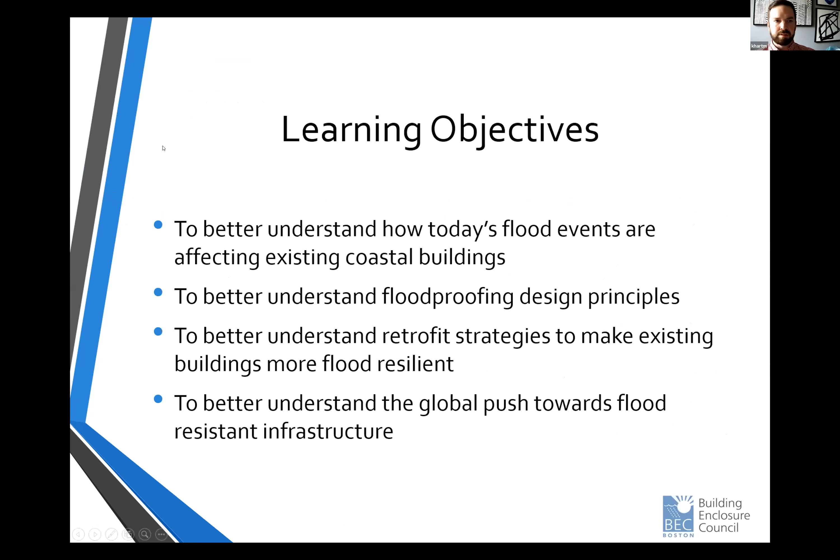Learning objectives, you probably have these already. Just a quick outline of what we're going to talk about.

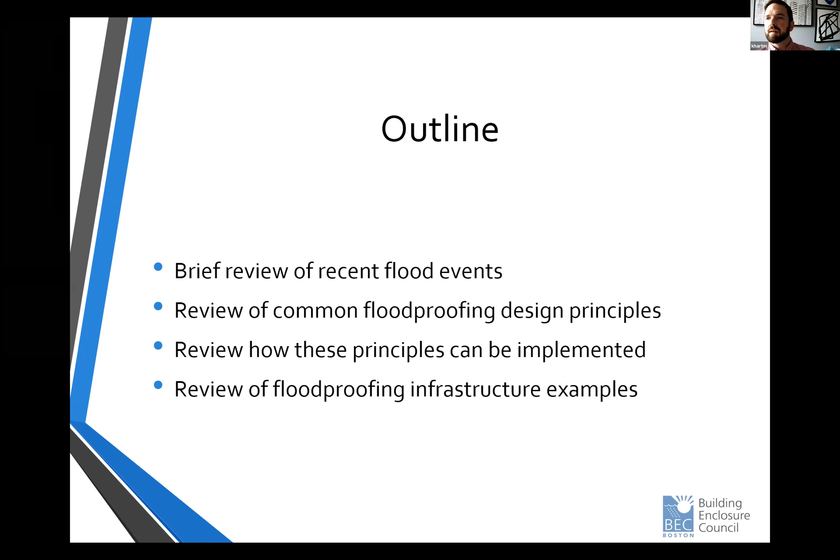First off, we just want to go through why this is important. Why are we talking about floodproofing more today than ever, right? So just a quick background on how we got to where we are today. Some questions here: are floods getting worse? Is that a problem? The short answer is yes. The floods are getting worse. We're seeing more severe storms and the repercussions of those storms. And the projections are going to continue that this is not going away anytime soon.

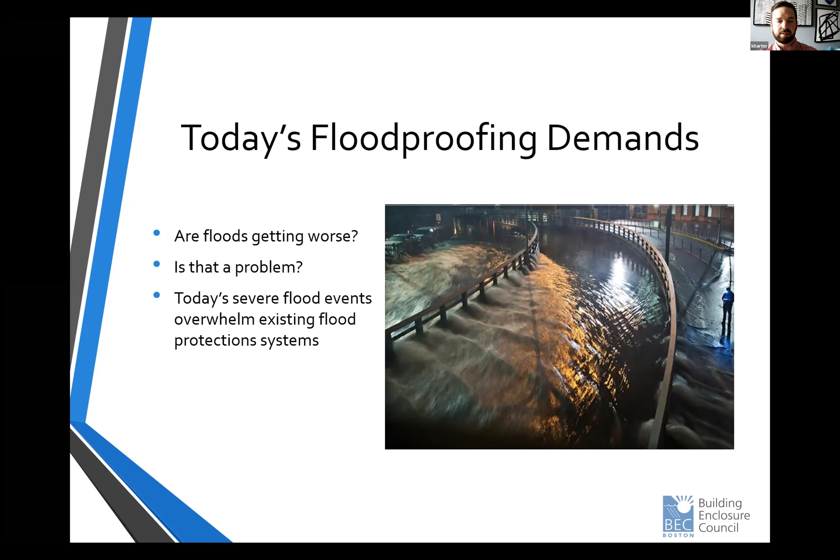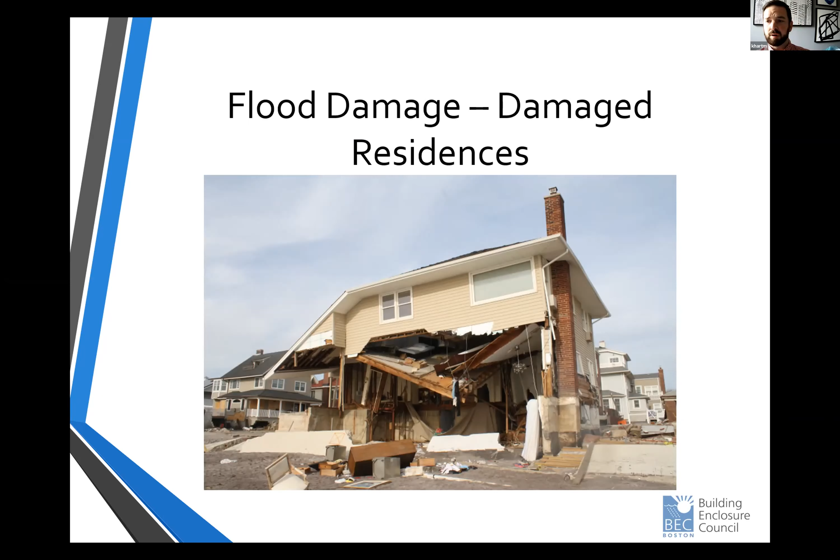So some examples, the first few slides are from Superstorm Sandy back in 2012. I'm sure everyone is familiar with Superstorm Sandy. Of course, here in New York, we're very familiar, but here's a low-rise, timber frame residential structure where the lower floor was washed out due to flood water, but damage just isn't caused by only flood water.

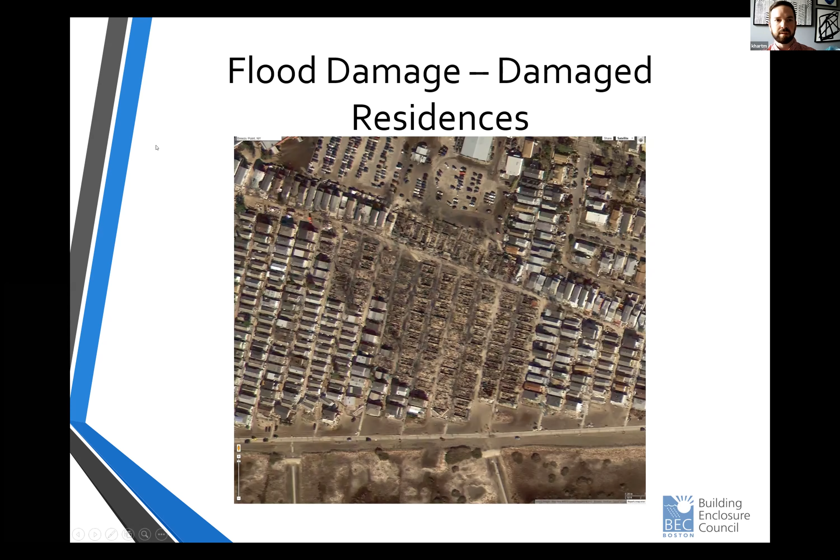Here's an aerial shot of Breezy Point in Queens where an electrical fire started during Sandy. Can you see my mouse if I do this? So you can see this area where one house, unfortunately, caught fire and the flames spread to this area. So while that's not your classic quintessential flood damage, nonetheless, flood damage.

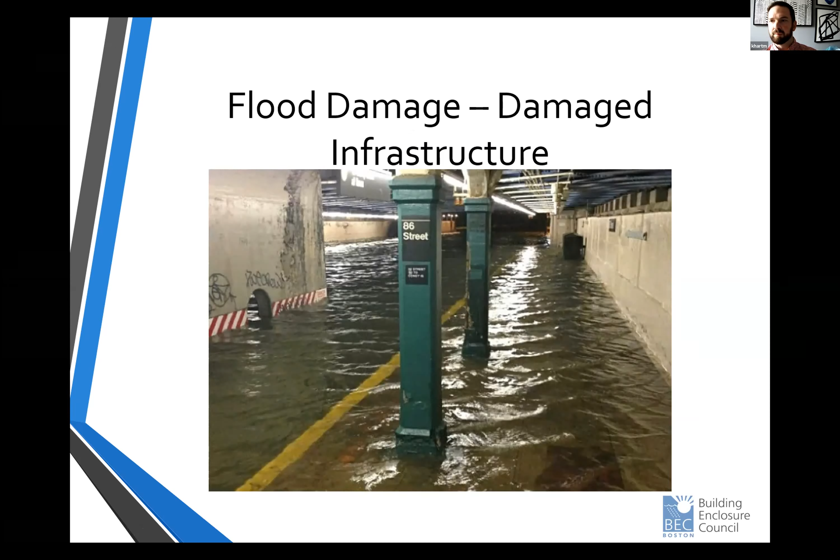New York City is not alone. Most coastal cities, whether you're coastal being along a river or along the Gulf or an ocean, are experiencing similar flooding conditions. In 2017, Houston was hit by Hurricane Harvey, considered the wettest storm in U.S. history. We'll touch on this a little bit. But since that, almost on an annual basis, Houston has experienced substantial flooding, right, on unnamed storms, not hurricanes necessarily. And they didn't used to have this frequent occurrence.

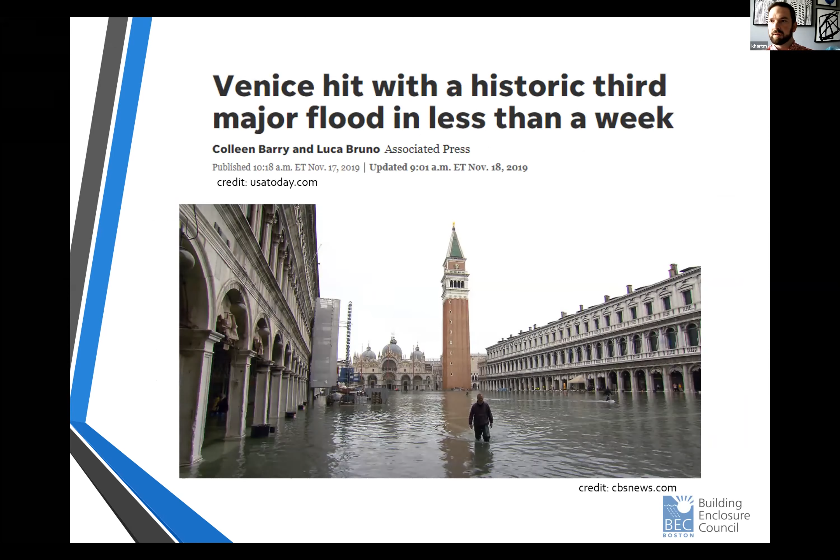So New Orleans, right, in 2005, Hurricane Katrina. And of course, it's not just a U.S. problem, it's a world problem. This is a shot of Venice underwater, and they, of course, frequently have flooding problems themselves. So what's causing this? Without getting too political, climate change, right? Climate change is real.

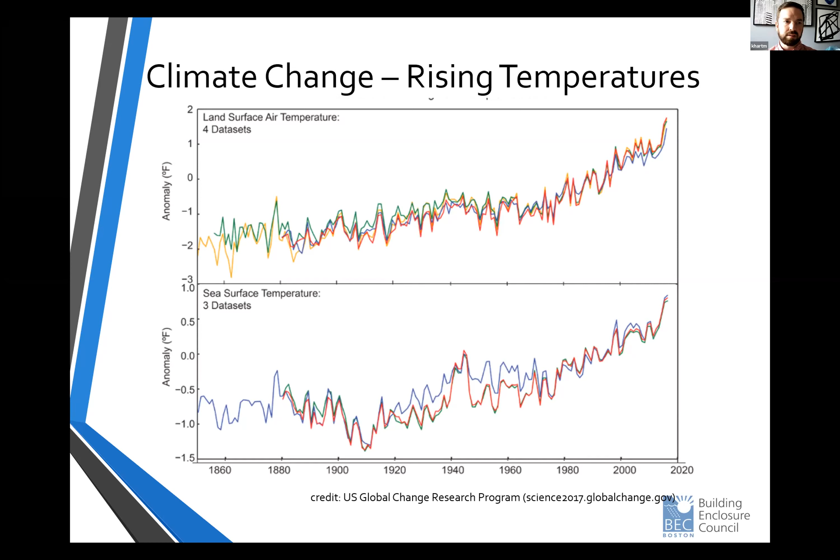This is credited to the U.S. Global Change Research Program. It shows over the course of about 150 years or so, a little more, the rising temperatures across 4 data sets.

What does that mean? I'm not a meteorologist, but I'll try to explain. Warmer air can hold more moisture, and that warmer air is the catalyst for more severe storms. So we're getting more 100-year storms, 500-year storms, and so on. Hurricane Harvey was one of the wettest storms the U.S. has experienced, with a peak rainfall reading of almost 61 inches in the course of about a week. They got hit incredibly hard with rainfall.

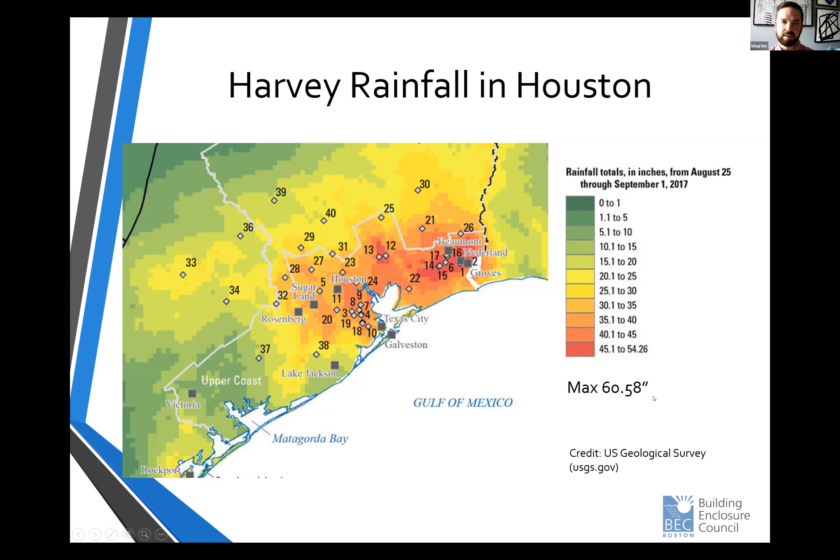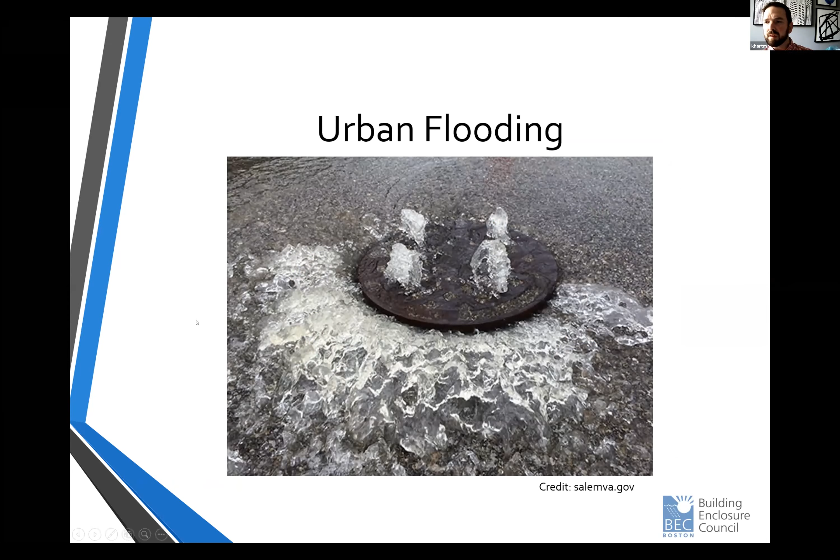Our current stormwater management systems, generally speaking, are not built to handle such large rain events. There's something called urban flooding, which in layman's terms is rainwater that hits an impervious surface and has nowhere to go. The drainage system can't handle it, or just doesn't have anywhere to pump to because its reservoirs are already full. That's proven to be a problem too in terms of infrastructure.

Climate change is also raising sea levels. With Sandy, the wind and rain of Superstorm Sandy were not the biggest problem. It was still a hell of a storm compared to most storms, but compared to your average hurricane, the wind and the rain wasn't that bad.

Now, with rising sea levels, we don't necessarily need a Superstorm Sandy type event. It doesn't have to be that severe to experience flooding. There's something called high tide flooding. This graphic shows it, where on the left, in the 1950s, it's just a schematic, but sea level would have to overcome a greater storm surge to rise up to the point where buildings flood. Now with higher sea level, you don't necessarily need a super large storm surge. You just need high tide, and that's high tide flooding.

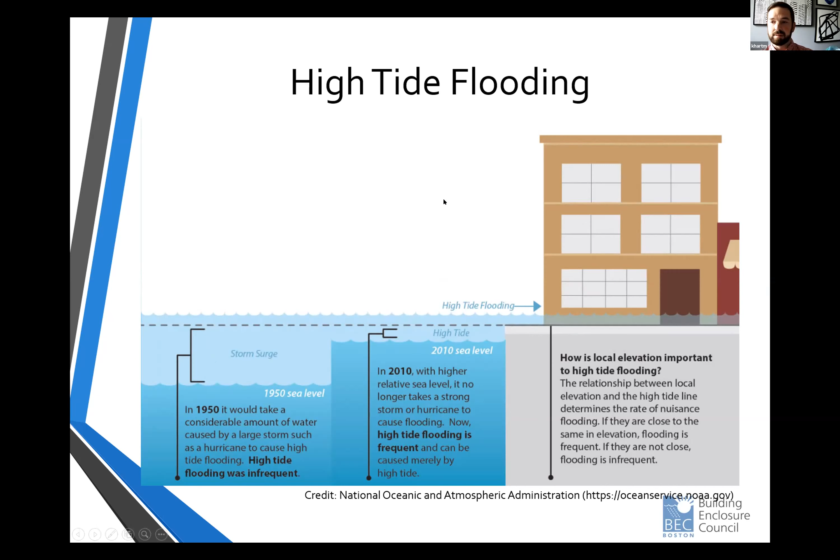This is something Miami experiences fairly frequently, where they call it sunny day flooding. There might not be rain, there might not be a storm, but Miami's built on porous limestone, and there are aquifers and groundwater within that limestone. As the high tides come up, it pushes that water up. So despite any rain events, you can have a week of sun, but if the high tide comes up high enough, it's going to push all that water up - sunny day flooding.

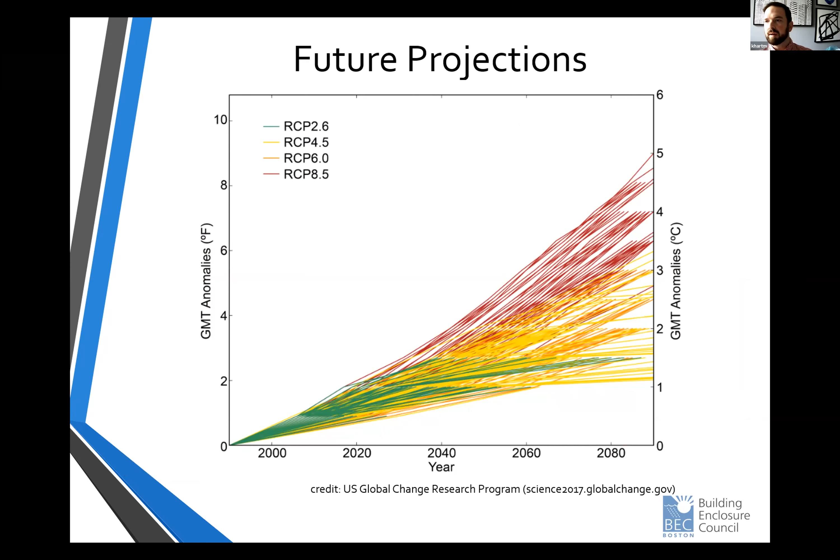And it's not looking too good moving forward. We're having the conversations, but projections show that it's only going to continue. So as an industry, we're starting to pay more and more attention to it.

In New York, after Superstorm Sandy, we took a look at our flood proofing protocols, or flood prevention measures, and started to sharpen our pencils. We realized that the flood maps we were using, the FEMA flood insurance rate maps, often abbreviated as the FIRMs, were dated from 1983. So we wanted to start updating our FIRMs, our flood maps, to better represent the conditions we're actually being exposed to.

Also, New York City adopts freeboard. This is something New York State implemented in 2010, and eventually New York City, when rewriting the code, would have to comply with the state minimums. But New York City did an emergency adoption of this provision to make sure we're beefing up our design elevations. Real quick here, you see my little equation, and this is something Doug's going to dig into in a bit, but I'll try to explain these briefly without stealing Doug's thunder.

The BFE, the base flood elevation - 9 times out of 10, you're going to get that elevation from the FEMA flood maps. That being said, there is a chance that your local jurisdiction will elect to go above and beyond.

And they'll have their own criteria. So if you're starting off on a floodproofing project, it's worth checking with whatever jurisdiction you're working in to see what they design to. But nine times out of 10, it's probably going to be the FEMA maps.

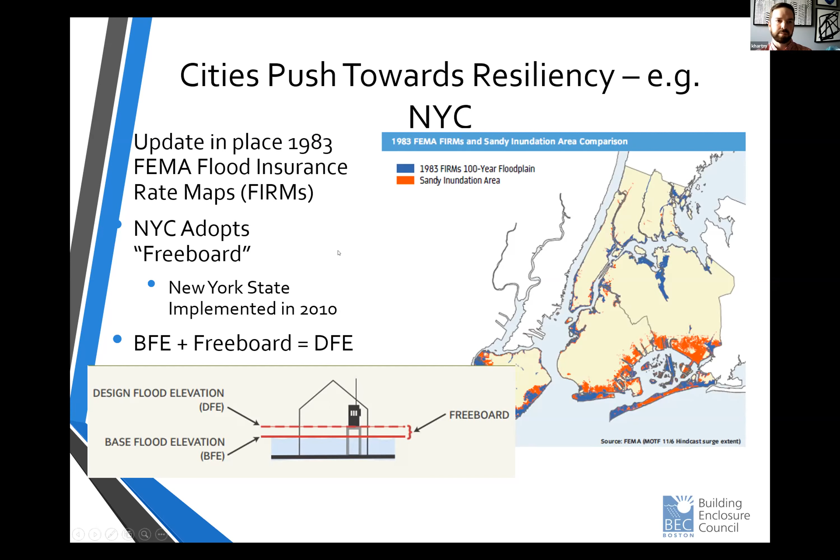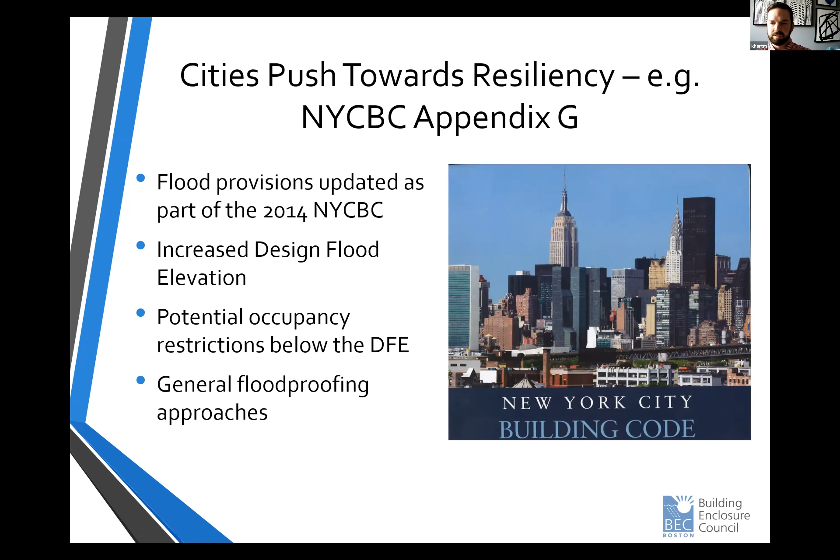So in 2014, New York City updated Appendix G. Appendix G is also in the model codes, your floodproofing chapter in the IBC. It increased the design flood elevation, and restricted some occupancy below that design flood elevation. Appendix G in general goes over your floodproofing approaches.

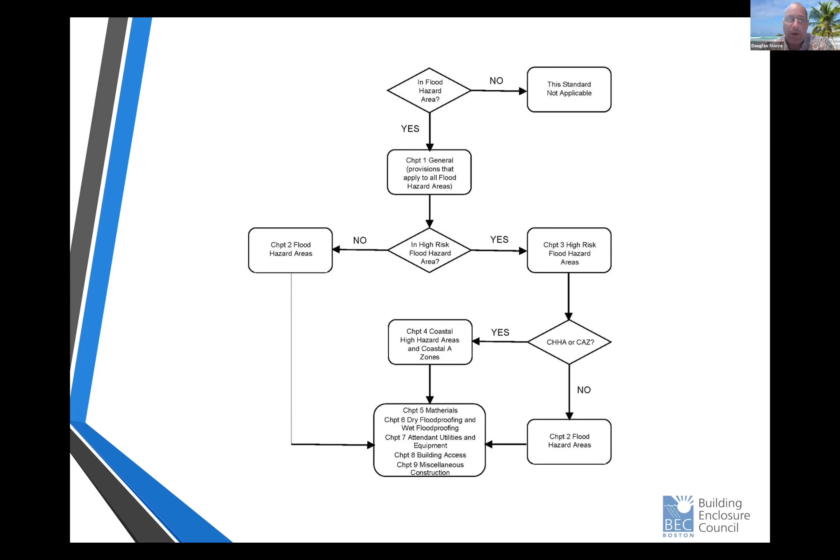So first, you have to determine whether you're in a flood hazard area, which is basically any site that has a 1% or greater chance of flooding in any given year. That's where we get our so-called 100-year flood elevation. All of the maps will refer to this. There are some other requirements, unless the local authority having jurisdiction has made different determinations, but it's pretty much that 100-year flood elevation.

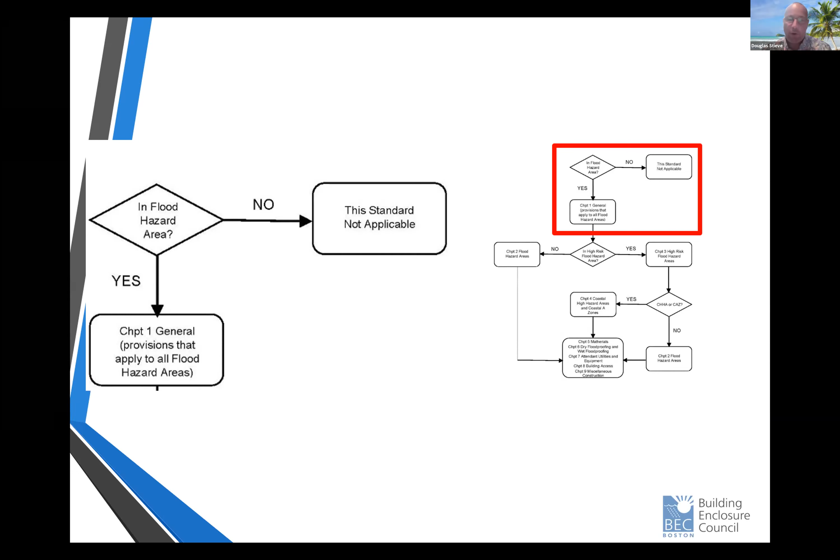So if you're out of that zone, you're good to go, you move on to the next item on your to-do list. If you're in that zone, then you have to go into Chapter 1 and start going through this decision tree process.

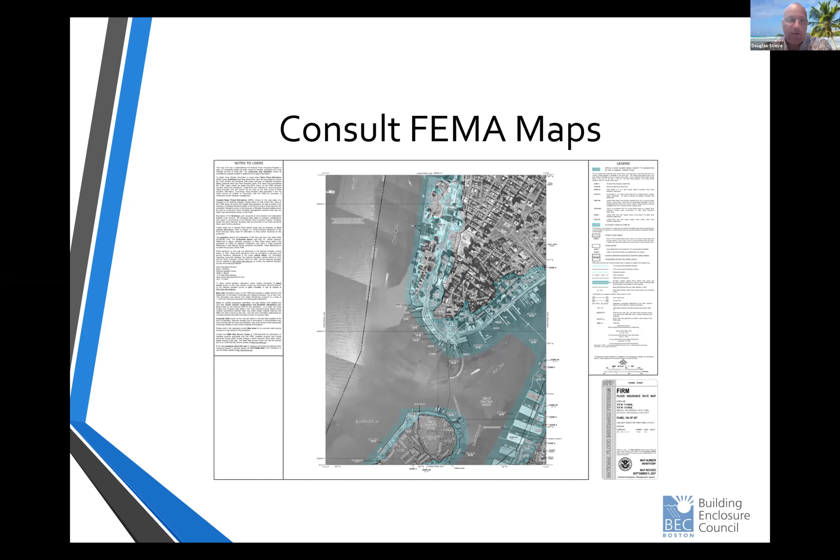So you consult your FEMA maps to determine where you are and which type of zone you may be in. This is Lower Manhattan, and some of the maps we use - you guys have similar documents up in Massachusetts.

And then you have to determine what type of flood hazard area you're in, and go through the different processes. We said yes, we're starting at Chapter 1. Now we need to define what design flood class we're in.

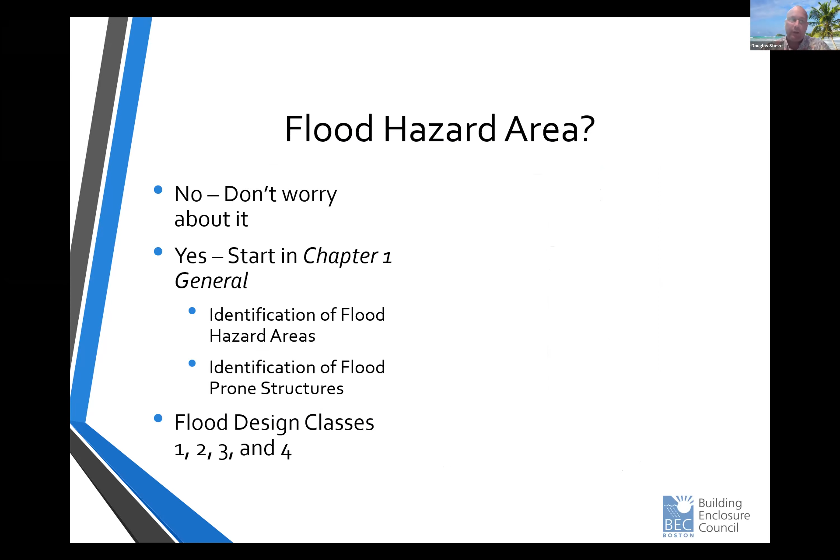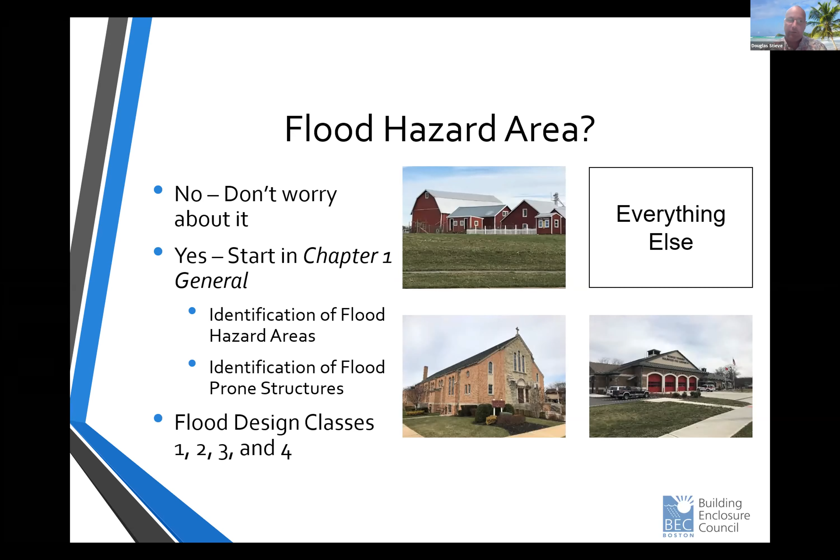The ultra conservative precautions we take are on the lower right-hand side - this is Class 4. These are your essential facilities, your fire stations, police departments, stuff like that. Very rarely will you be in one of these. Everything else falls into design class 2 - that's the catch-all. So the guide says, is it 1, 3, or 4? If not, you live in class 2.

Okay, so then you need to determine if we are in a high-risk flood area. These could be alluvial fans, areas that are subject to ice jams, to mudslides, and also two different categories for coastal areas, in a coastal V or a coastal A zone. If you're in one of those areas, you have to go into Chapter 3.

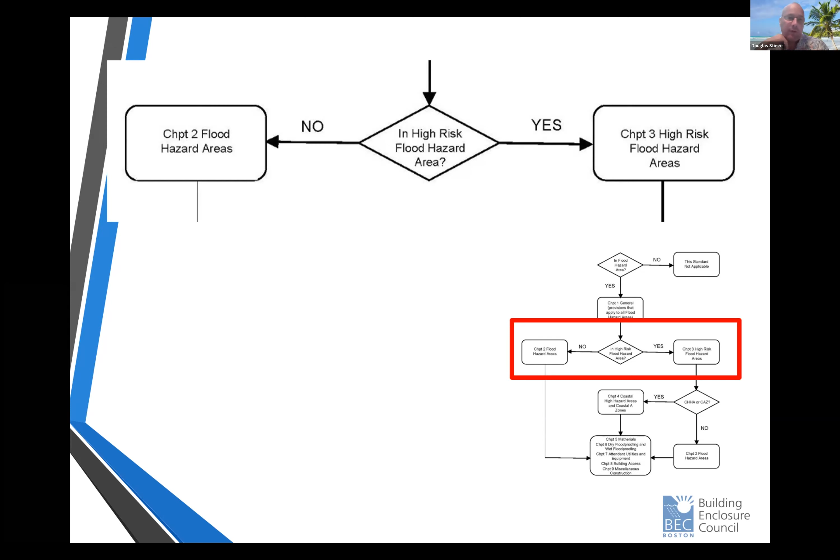If not, we have to deal with Chapter 2, which is a little less onerous. So if you're not in one of these areas, you're not up against the coastline, you're not in another area that uniquely has floods, we have to still comply with Chapter 2 and some of the later chapters in the document. They're going to have different elevation requirements for where you have your design flood elevation.

The use of fill is talked about and discussed. You don't want fill floating away, or you don't want it to erode away. Slabs on grades and footings, you're now going to start getting into some tie downs to prevent your slabs from becoming buoyant in a flooding event. It discusses foundation walls and different requirements for enclosures that are below the flood elevation.

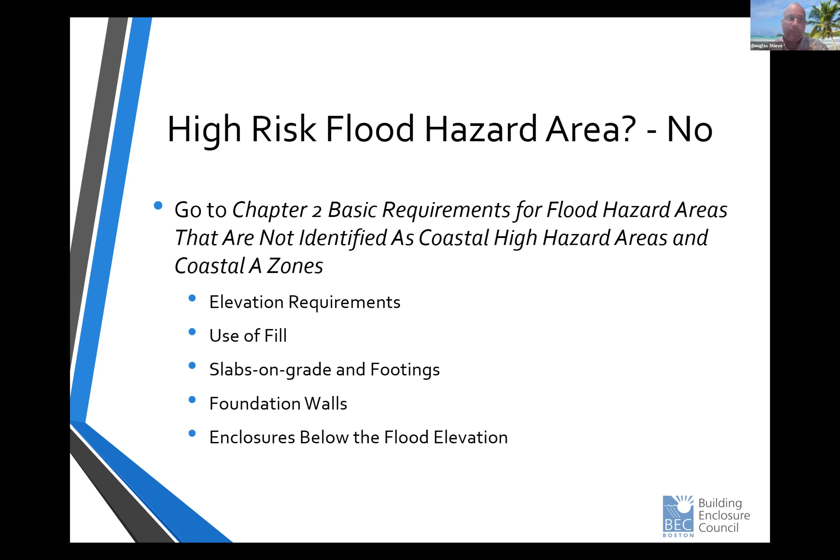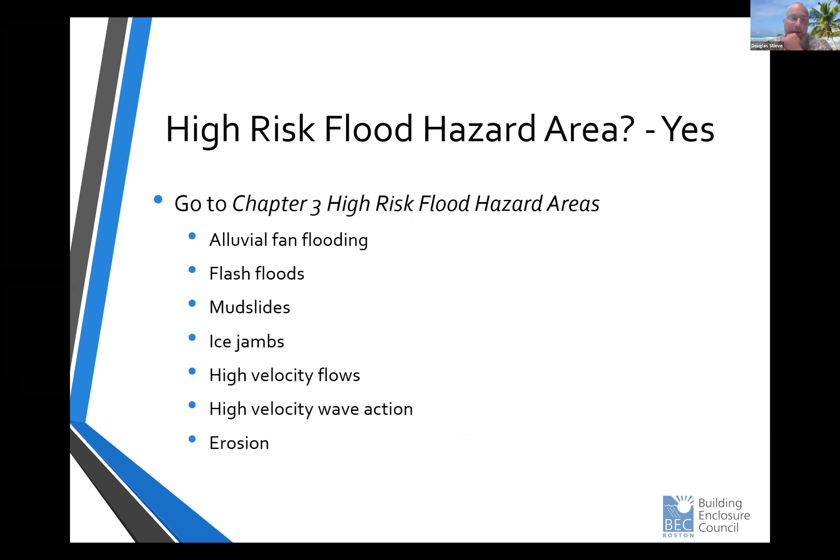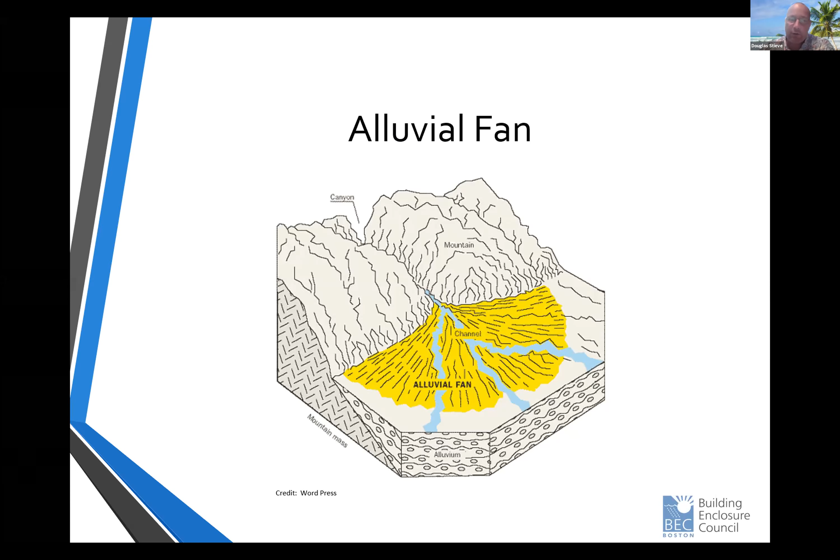Okay, now if we are in one of these areas, there are different types of geology or land masses. This is more for, a lot of these slides are going to be out west, but we have restrictions on construction in alluvial fan areas, where if we have a mountainous region, we have a canyon that may take a lot of water, we could have flash floods in this area here. So construction is prohibited in these areas.

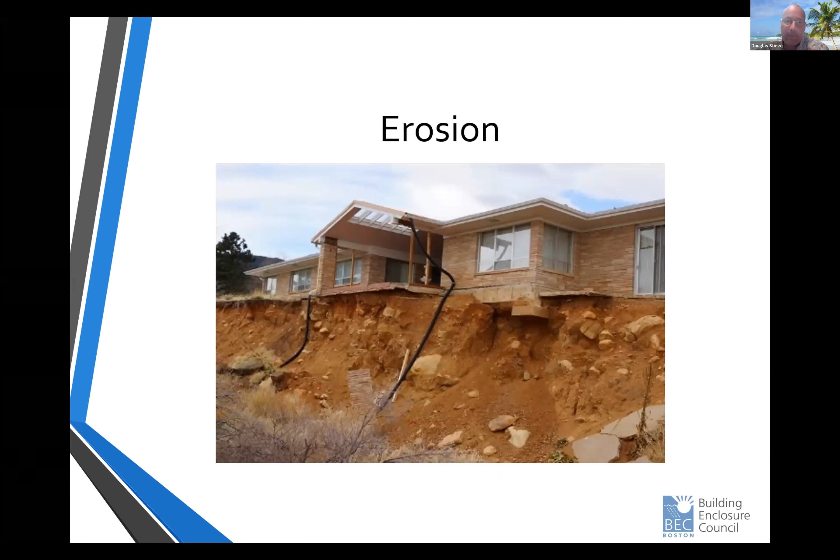It's also prohibited in areas that are prone to erosion. Mudslides are another area, and areas that are subject to ice jams.

Now, however, building in these areas is permitted if there's a protective work, something that blocks the flow of water, such as a dam that's constructed, something that changes to mitigate the risk. If one of these things are constructed, then you're out of those areas. And that's why some of our flood maps keep changing. They keep changing because we have sea level rises, but they also change in these other areas if we have protective works, big civil engineering projects that are put in place to mitigate the risk.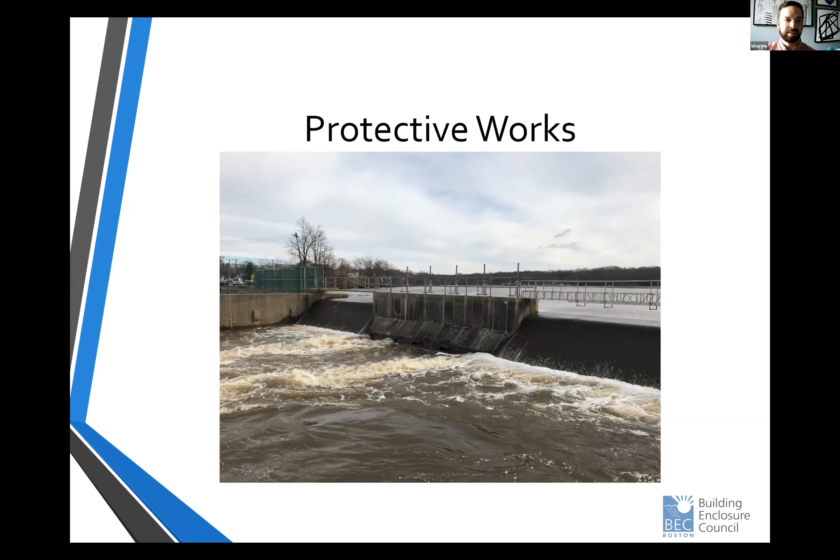So, yeah, if I can add to that real quick. The maps, I believe the FEMA maps, are updated every 5 years. And to Doug's point, you're not allowed to get around this, per the code. You can't build on an alluvial fan or an ice jam area or a mudslide area unless the FEMA map is updated. You can't say, but they built a dam next to my job site. The FEMA map has to be updated, and then you can proceed. Very good point. Thank you, Kenrick.

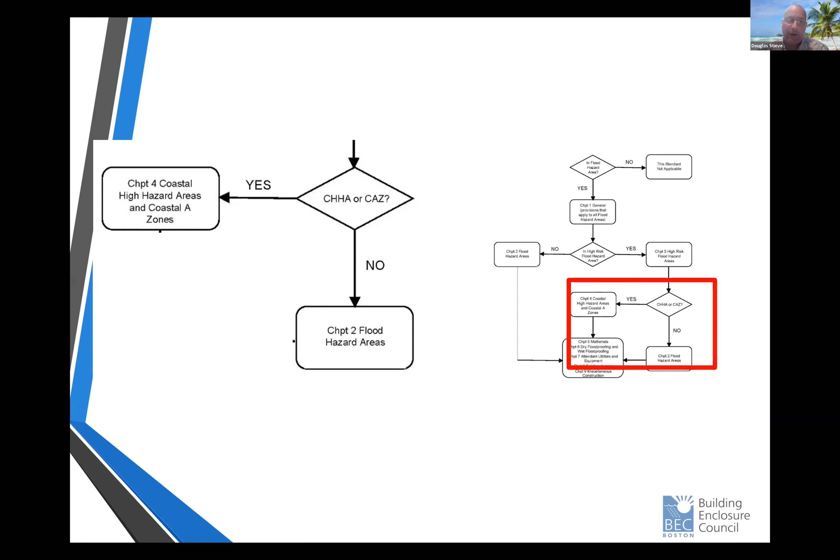Okay, and now some of our more restrictive requirements are if we're up against a coastline in a coastal high hazard area or a coastal A zone. Basically this V zone is that coastal high hazard area zone, and the A zone, they have to deal with the size of potential waves. So not only do these structures need to be designed for the elevation of where the water may be, these structures need to be designed so that they can resist the impact of waves and resist the impact of debris that may be getting washed around by those waves.

And then we have this BX zone, which is the 500-year floodplain. Where I bring that up is if we have a structure that's a class 4 structure, that firehouse, it needs to be either on a piece of land, outside of that 500-year floodplain, or our elevations have to be increased, more so for like a police station or something like that. There will be special requirements for, say, a fire station, because you will have special requirements for building types that have to have access at grade level. But just that's why I bring that up, because that's how critical they're considering that design class 4.

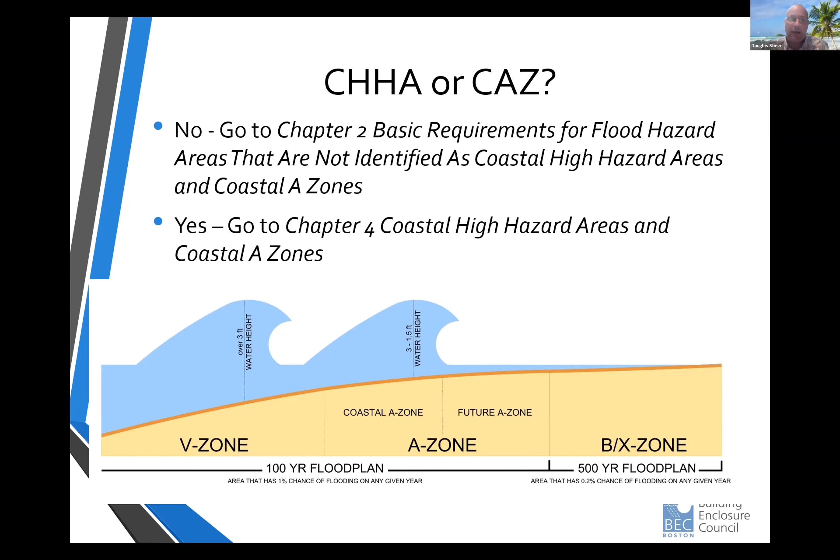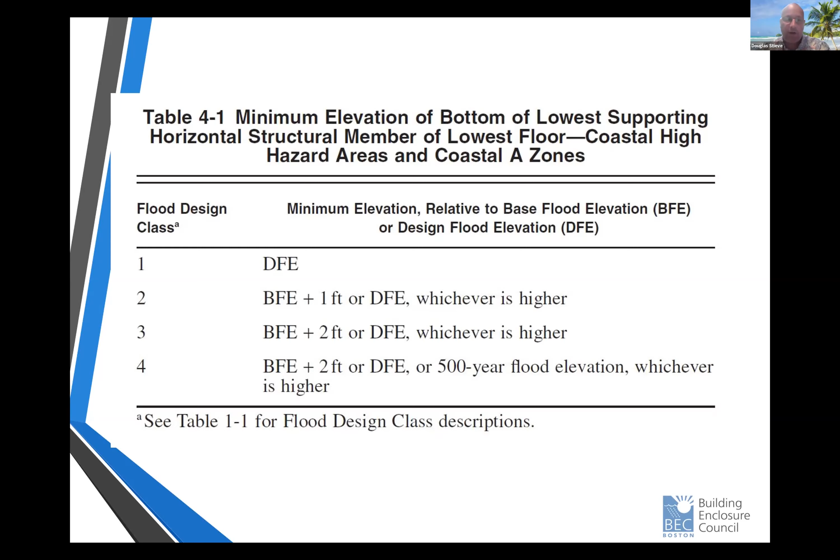At the end of ASCE 24, the last chapters, 5 through 9, deal with all buildings that have to comply with the standard. They cover different materials, different flood proofing components, requirements for breakaway structures, and other related requirements.

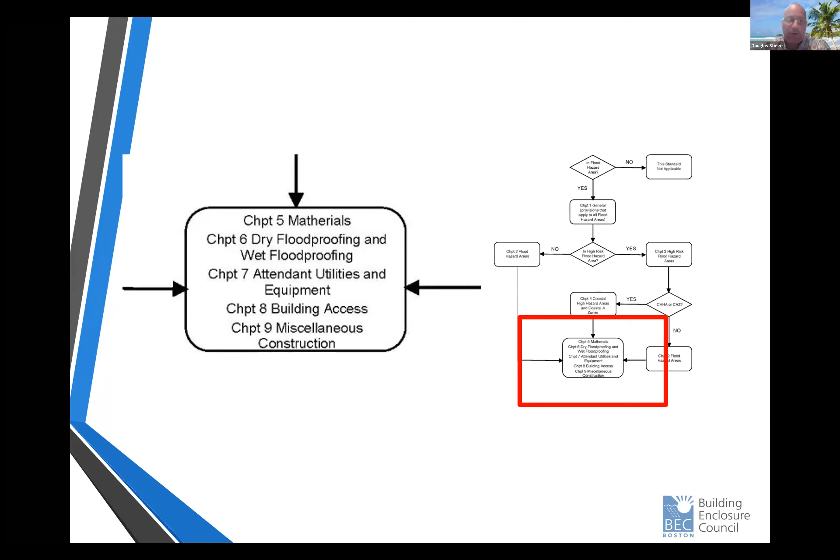One of the big differences is whether you dry flood proof or wet flood proof. Dry flood proofing is where you use the mass of the structure to resist the water, so your walls and structure need to be strong enough to resist the pressure of the water, and in coastal areas, the force from waves and anything carried in the waves, while remaining relatively watertight.

One of the key factors is the design flood elevation. With dry flood proofing, you're not allowed to have any residential space below that elevation. It could be a storeroom or some non-critical space, but residences have to start at or above the design flood elevation.

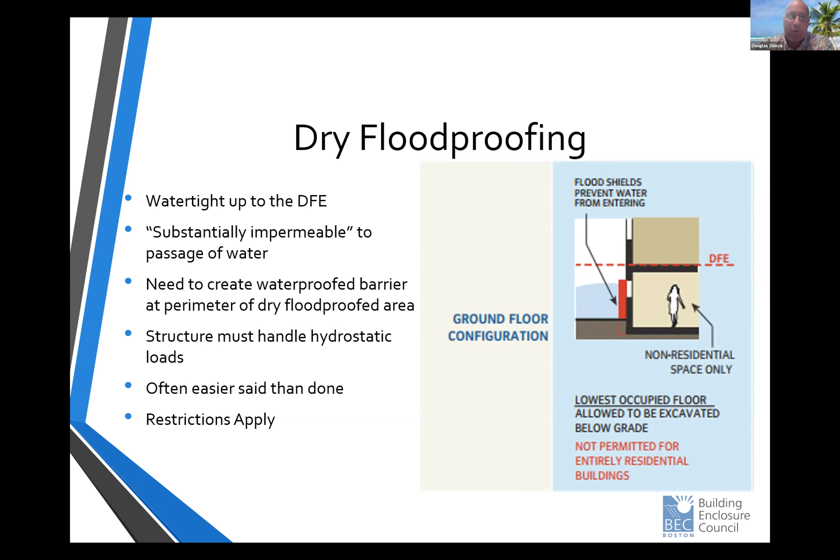Wet flood proofing, on the other hand, is like in a beach community where you see houses built on stilts up out of the water. We're allowing the water to come in and allowing the water to come out.

That really reduces a lot of the stress on the structure, because one of the problems with dry flood proofing, or no flood proofing, is that as water hits the outside of the wall it puts a lot of pressure on the outside. But after the building floods and the flood waters recede, you still have all that water inside the building, which puts force on the wall coming back out. That's a big thing to contend with, dry flood proofing versus wet flood proofing.

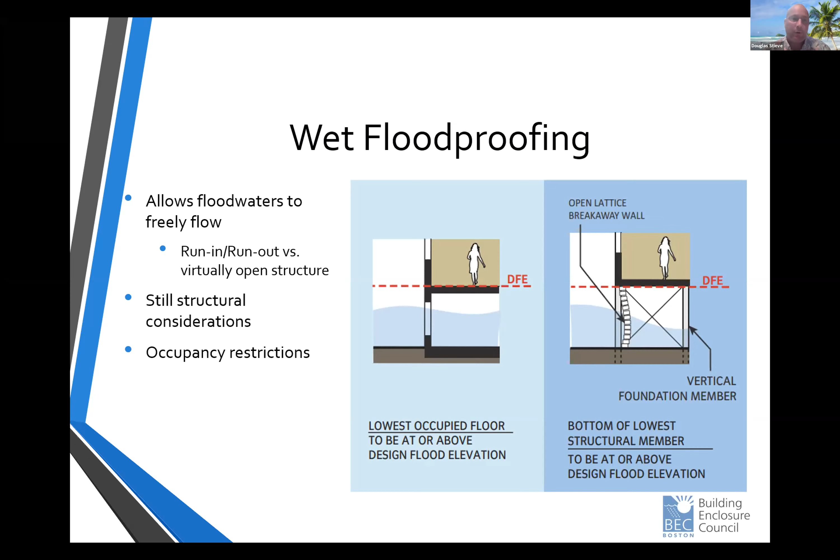There are other things used in dry flood proofing, like man-made elements that are put in place. The new ASCE 24 has requirements on the minimum alert time needed to use something like a deployable barrier or floodgate. They're now requiring at least a 12-hour notice before those things need to be deployed.

But particularly in retrofits, there's an opportunity to elect to do more than you have to. A lot of the floodproofing jobs I've personally worked on involved owners electing to do the work, even without a major alteration or substantial work that would trigger the need to update their floodproofing system. They said, hey, Sandy hit us hard, or insert storm name here, hit us hard, we don't want that to ever happen again, and we're going to do something about it.

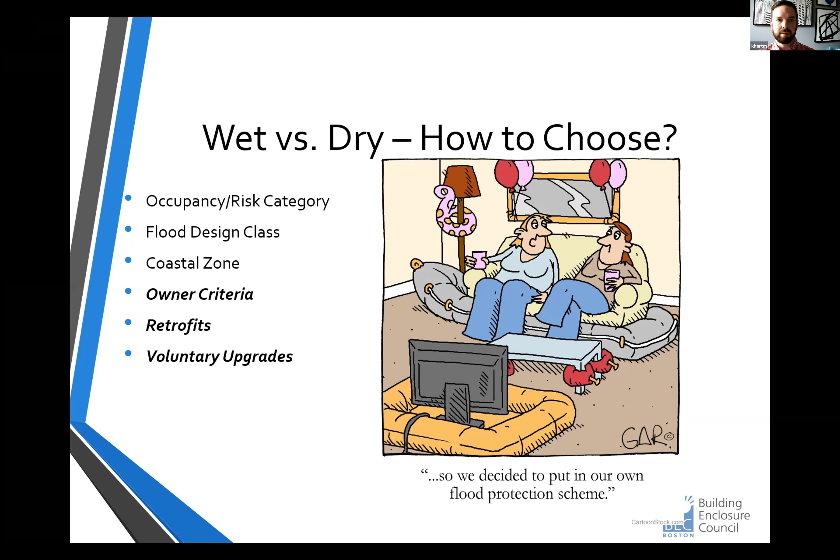So here's an example, a very simple, straightforward one, in a cellar space in a basement, downtown Manhattan, where on the other side of this wall is an oil tank. During Sandy, flood water came in.

Let's say the oil tank was full of oil - oil's still lighter than water. But let's say the oil tank is half empty and now there's air in that tank, so it's very buoyant. Flood waters come in, the oil tank starts floating and rips away from any conduits and connections attached to it. Now oil's spilling out in the flood water - you can imagine the mess that created.

The owner said, I don't want this to ever happen again. I don't care if my cellar space, which I use for storage, gets wet - I don't want water in my oil tank room. So that's what we did here.

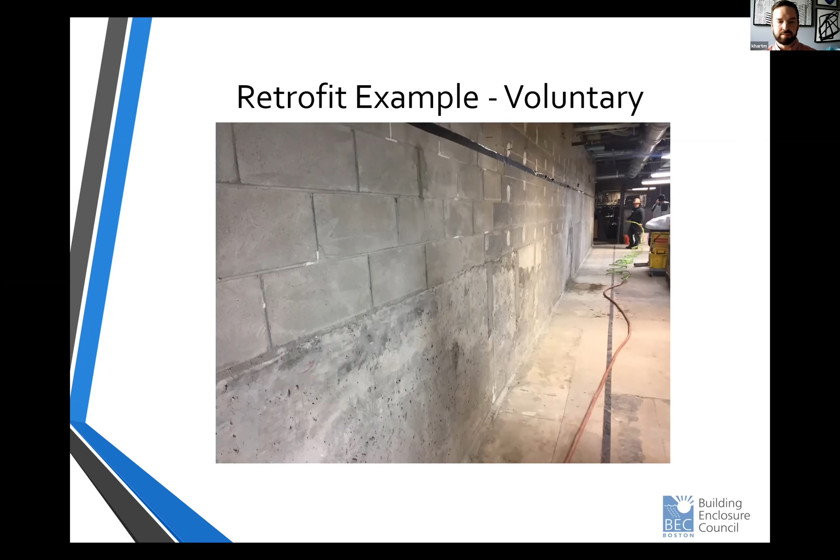A more complex retrofit that costs a lot of money and time - again voluntary - at an adjacent building to the one I just used as a case study. They elected to structurally harden and reinforce this wall, which my mouse is circling, and create a new wet-dry line at this location.

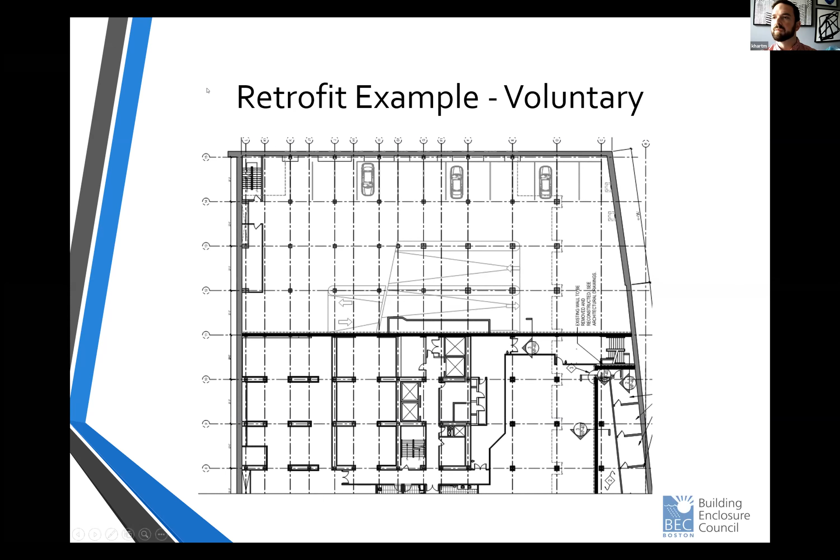But as belt and suspenders, they decided to do this - imagine a 60-foot tall, 18 or maybe 24-inch thick cast-in-place concrete wall with significant steel reinforcement. They needed to tear up the slab on grade, pour new foundations, and break the slabs going up so this could run continuously vertically through the existing floor slabs. It was quite a bit of work - belt and suspenders, but worth it for some buildings.

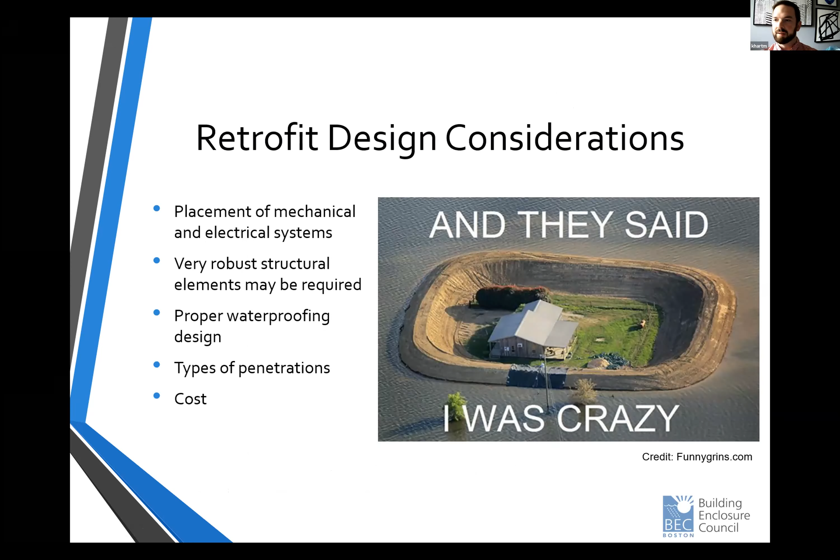Electrical and mechanical equipment - very often in retrofits, this is what you're trying to protect. This is the stuff that causes the most headache and can shut your building down. So some options and considerations: if you're trying to protect your mechanical equipment, instead of building a waterproof box around it, why not raise it up, get out of harm's way? We've seen buildings do this, where instead of putting switch gear in the cellar space, they take away leasable space on the second or third floor and move it up out of the floodplain.

If you're designing a new structure, there are provisions that say you have to do stuff like this - you can't put your sensitive mechanical and electrical equipment in a flood area, particularly a wet flood area, for obvious reasons. Consider buoyancy too, which we talked about.

Conduits are tricky, again in retrofits - very tricky, because this mechanical equipment services something in the building, and those conduits, as they pass through the wet-dry line on the wet side, must be watertight, or else water will get through inside the conduit and travel right into the dry space. So it's very important that the conduit, when it's in a wet zone, be watertight.

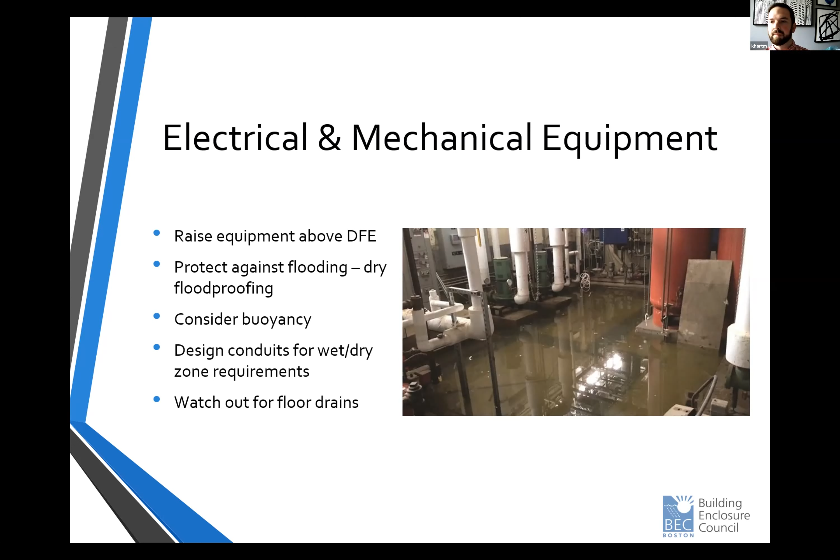So floor drains, a lot of times your backflow preventers might be down the line before you enter the street. But for floodproofing considerations, make sure your floor drain in the mechanical room doesn't connect to a bathroom or something else in a wet zone. Because if there's no backflow preventer between those two, water can go through that bathroom floor drain and flow right up into your nice new flood-proof dry zone of the mechanical room. That can be a really tricky thing to trace sometimes.

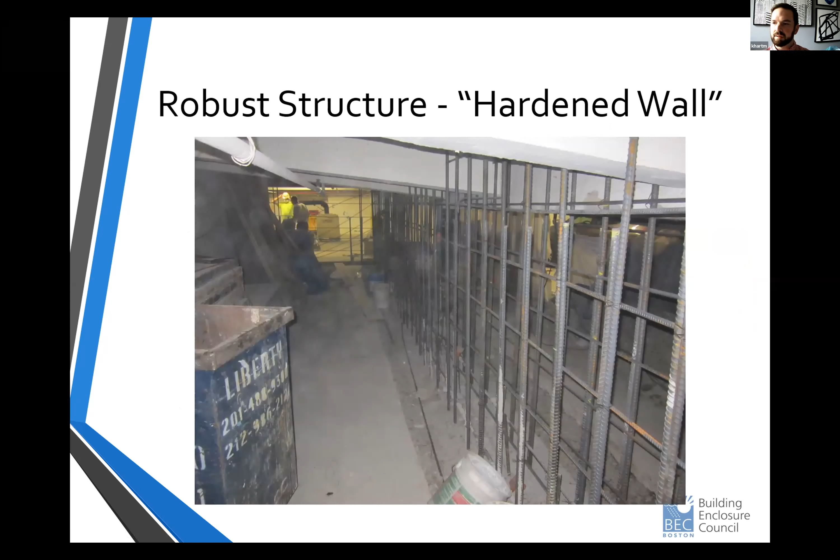Hardened walls, we talked about this. Here's an example of a new concrete hardened wall being built. This is pretty light in comparison to some I've seen, but nonetheless you can imagine the hydrostatic pressure and loads these things will experience, so they tend to be pretty beefy. Proper waterproofing design could be a whole other discussion at a later time, but long story short, you want to design for substantial hydrostatic pressure.

Continuity is important - make sure you're tying in so the flood water can't circumvent your nice new membrane. This is probably one of the biggest ones, let's say the bottom two are probably the biggest in terms of things that might get overlooked. But durability of the membrane, and this speaks to the toughness of the material, the robustness I should say.

Not that you would do this, but you wouldn't want to use a single ply type thing. That's not a good application - you want something with a little beef to it, redundancy to it. This is not something that can easily be tested for quality assurance purposes - you cannot replicate a flood in your building. So often you want some redundancy, a nice thick robust application.

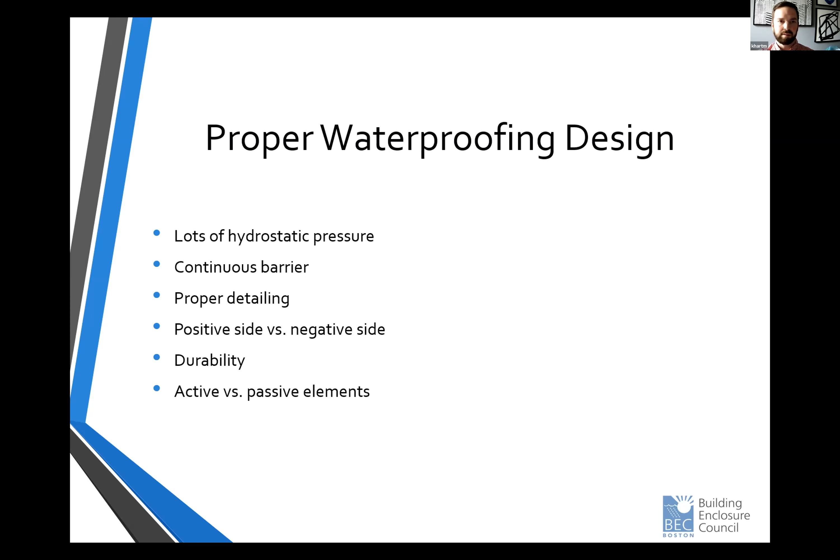The last bullet point on this list, and Doug mentioned this briefly, is what I refer to as active versus passive elements. Passive being things built into the system that once you construct it, you set it and forget it - you don't have to work to implement it. An active system, as opposed to passive, would be something your maintenance team or an outside third-party vendor hired by the building would have to actively go in and implement. That could be a floodgate, a flood barrier, something not normally in place until the flood alarm bells are ringing, and then everyone rushes and puts this in. I'll show a few examples in a second.

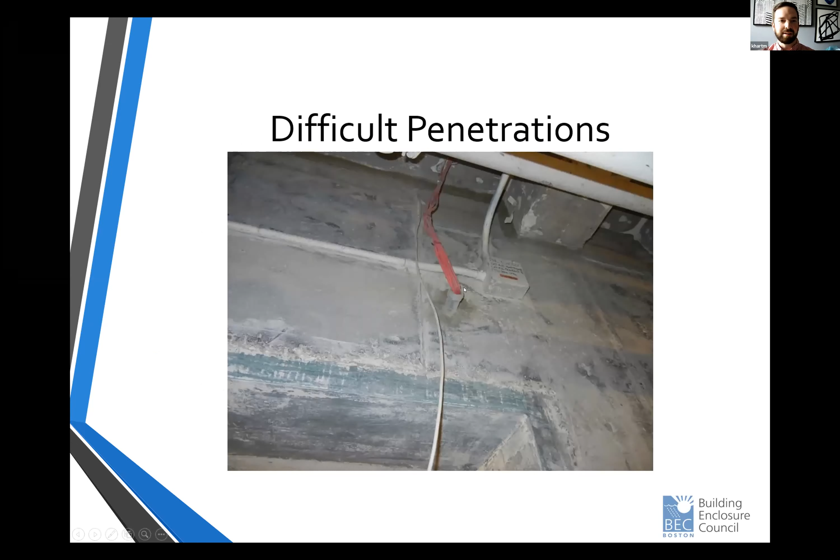Penetrations, mentioned they can be tricky. Here's a nice new hardened concrete wall with this open conduit penetration, all these wires coming through. There was no plan for this when we saw it - there was a plan after, but when we saw it, this was just going to be there. Of course water can shoot right through it. And your everyday conduits, electrical lines going through, are not generally watertight. Along the length of this conduit - we're standing in the wet zone here - this should be watertight so water does not get in the conduit and travel through our nice new hardened wall.

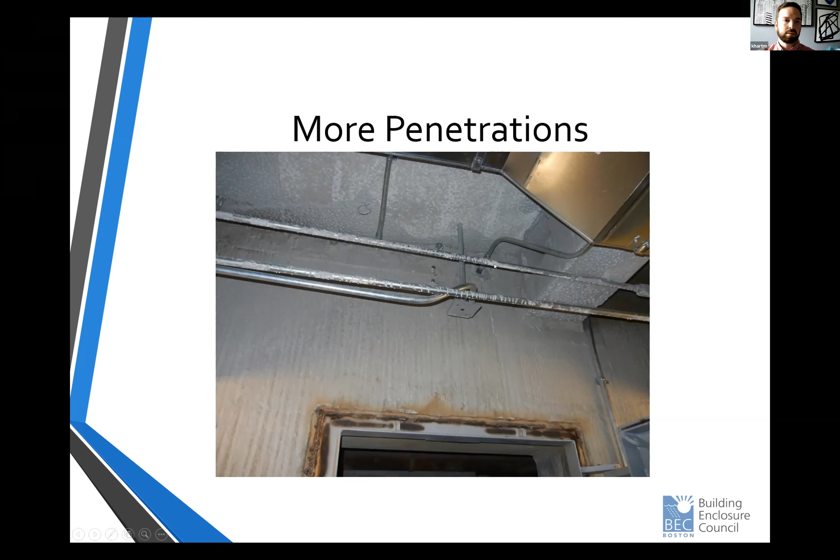Access doors - this is arguably a penetration, a break in your waterproofing, but nonetheless you need them. So we have these submarine type doors where you have these clasps, we call them dogs, that when you shut the door you can seal a gasket and make this watertight.

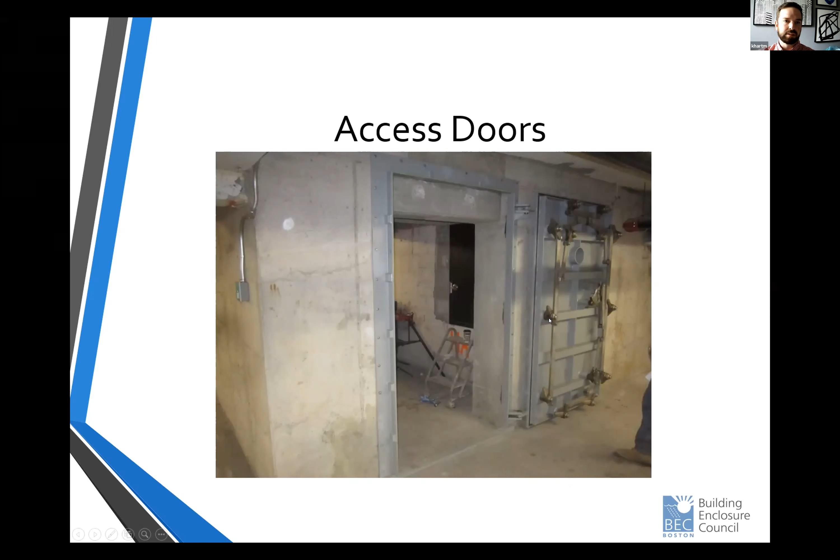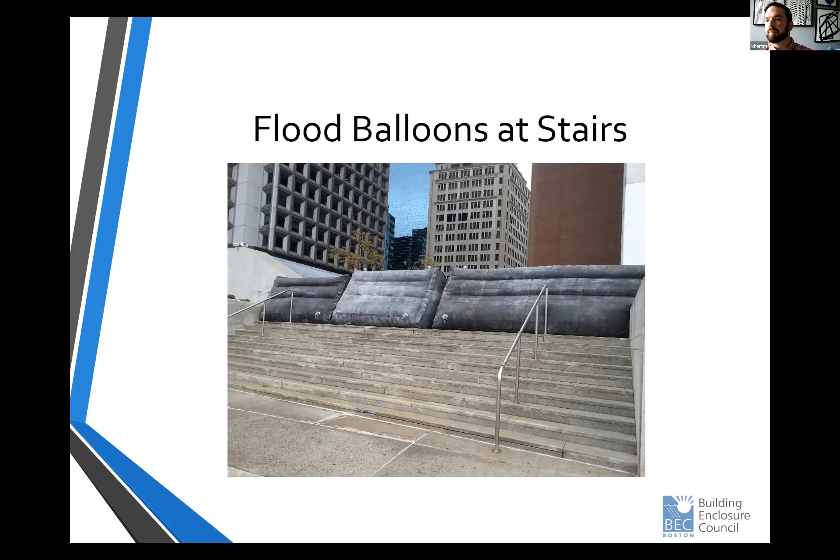There's other types of barriers too. Here's flood balloons, typically filled with water, not air, so they don't float away, at the top of the stair, some towards the street. You can see this is downtown Manhattan - there's the East River right there.

Floodgates - this is actually that example I gave you before with the parking garage and that very expensive hardened wall. Here at the top of the ramp, here's hinged floodgates, very large, two of them. They're anticipating the structural load that's going to come from the wave action that Doug mentioned. So here's already a substantial concrete pier, but they had to brace it with new steel.

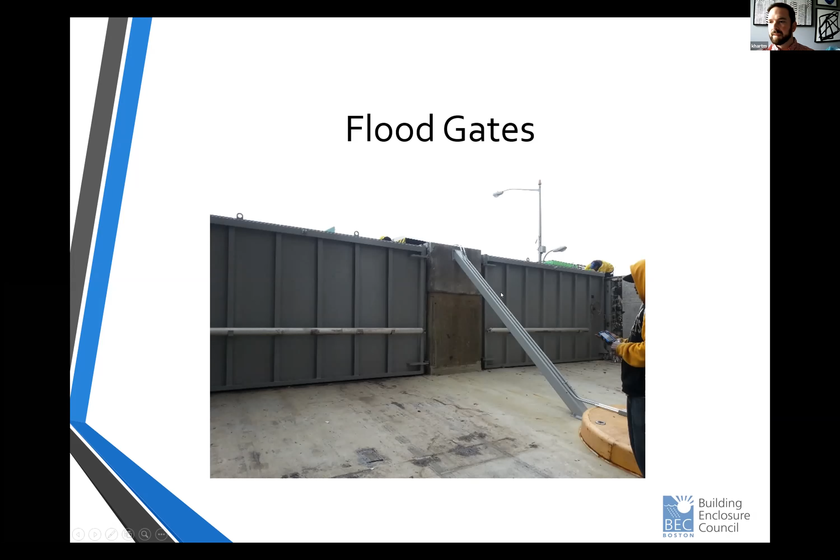For redundancy, this building wanted to use two floodgates in case one didn't work, and this is a stackable floodgate. Given that they're kind of smaller in size, these would typically be stored at your building, but then the maintenance staff would have to come out - it's almost like Lincoln logs, you can stack them up one, two, three, four.

You stack them up into tracks and build it up. They're gasketed so they seal.

I mentioned the active and passive elements. As you're probably already thinking, there are obvious reasons to have more passive elements in your system than active, because these stackables and those balloon-type barriers require people who install them to know what they're doing.

They have to know the system, the barrier and the balloon, but they also have to know the building and the plan, to know that when a flood's coming, when a hurricane's coming, someone has to go stack these things up, someone has to go inflate the flood balloons. We can't have any pinholes in our system or else the whole thing doesn't work.

It's only as good as its weakest link. So maintenance staff has to be continually trained. And if there's a changeover, whether someone moves to a different position or a new person comes in, they have to be continually trained.

Often buildings will do annual or semi-annual dry runs, and that's expensive—you're paying your team to install these things, normally overnight or on a weekend. The bigger ones, like the flood balloons, might be stored off-site, and then you'd have to rely on an outside vendor to truck it in and assemble it for you. So you can anticipate the logistics, headaches, and uncertainties that come with these active systems.

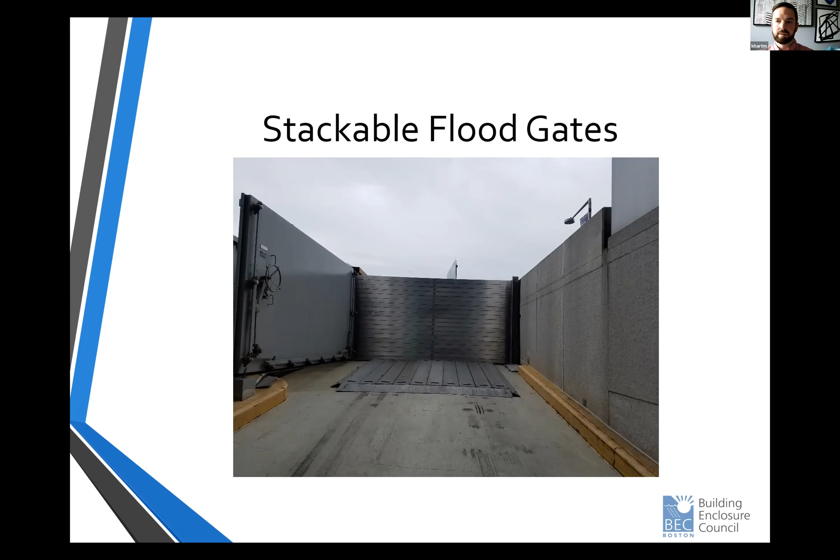So if you can, my two cents is: if you can build it into your building, like a hardened wall type thing, I say do it.

Here's another example of a barrier. Here's a floodgate to the left, and here's a stackable barrier, and this serves two purposes. One is to keep water away from the glazing system. This building did get hit in Sandy, but reportedly this glazing system held. But now the concern is that cars and other large debris floating in the water can bang against the glass and maybe break that system that held before, and a broken glass panel is not going to hold water. So they put this up to both prevent water and protect the glass.

Oh, here's that slide, I thought I deleted it. I don't want to spend too much time on this because I want to leave time for questions, but it helps to see photos and plans to appreciate how complicated this can get.

So here's an example where the blue outlines are wet floodproof areas, i.e. water is allowed to come in after the flood recedes. The water will either be pumped or drained out in some way. And then the red area is dry floodproof—the building said they do not want, by any means, a substantial amount of water. My carpet can get wet, but I don't want flood waters to come into this area.

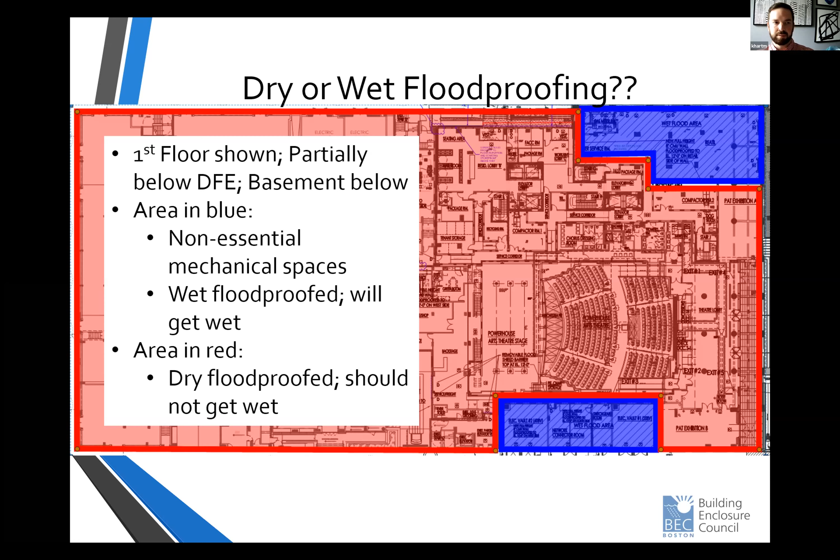So the question here is: is this considered dry or wet floodproofing? This is very common, it's often a hybrid method. In new construction, where you have a little more control and your parameters are a little looser, you might see more dry floodproofing, depending on the occupancy, residential or commercial. But in a retrofit, you're often just trying to protect your key areas, your sensitive equipment, in which case it's kind of a hybrid—you're letting some water in, but trying to block water at other locations.

So some design considerations—a lot of these we went over, but the one thing I really want to talk about is this 3D design consideration. What you're looking at is a first floor plan, so you can presume, and it would be accurate to presume, that there's a basement or maybe several cellar levels underneath this area.

Let's say that those cellar levels are allowed to get wet. So given that we're on the first floor and these blue areas are subjected to flood water, you can bet that the cellar levels would be fully flooded by the time the water gets as high.

So what happens, your structural guys will typically design your floor slabs for gravity loads, right? That's probably the number one thing, whether it be live loads or dead loads. But in a flood consideration, where there's hydrostatic pressure coming up, now your structural slabs have to resist a substantial load in the upwards direction. Depending on the building and the situation, you could overcome whatever dead loads are imposing, and now you have an uplift condition. So if not addressed, the retrofit condition can be very complicated and very costly to implement retroactively.

We talked about floor drains - while we're talking about that too, it's not only structural, but that water cannot come through any conduit, any crack, any fissure, whatever - it cannot travel through this slab. So again, that wet-dry line doesn't have to be a vertical hardened wall. It can be a horizontal slab too. And again, this gets very complicated quick, as you can imagine.

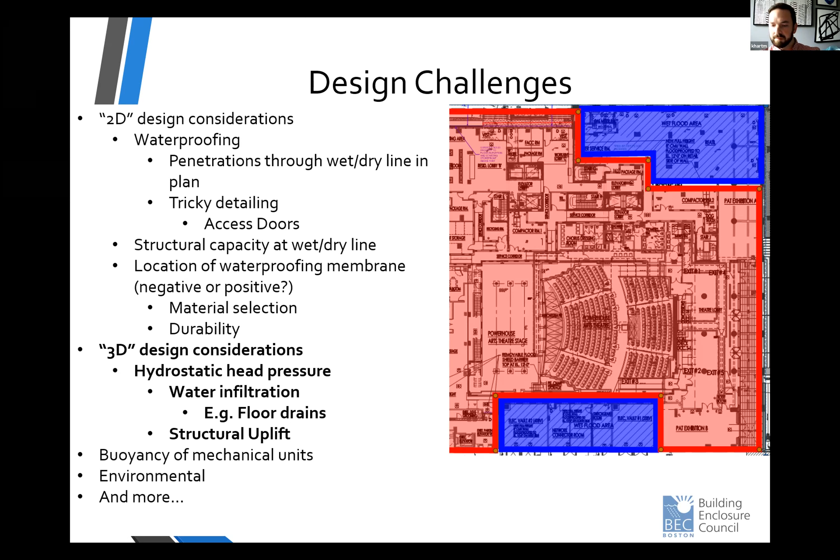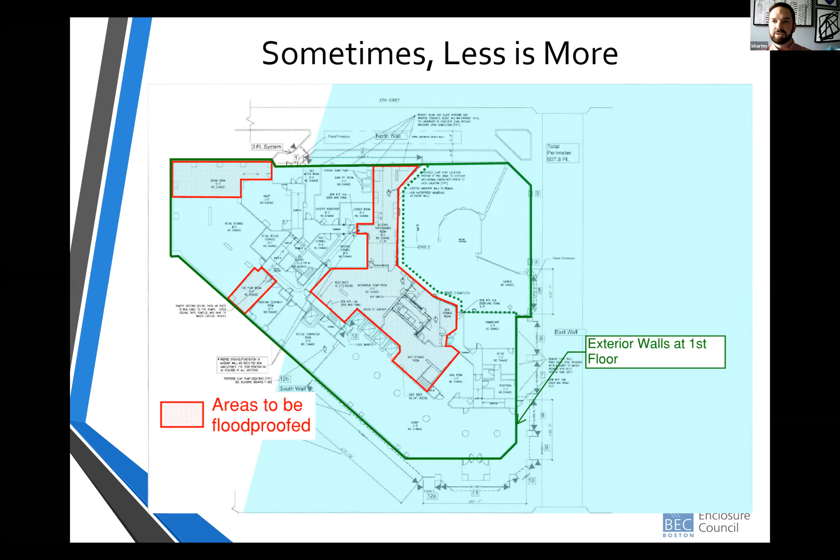So the genius moment, the aha moment, came when we said, hey, what if we created this U-shape in the blue line here? Instead of just protecting these red areas, these critical areas, we're able to protect most of their space. This over here in the upper right of the plan is a parking garage - they don't really care if this gets wet. This is a lobby - they said we don't care if this gets wet either. But if we were to allow the parking garage to get wet, the lobby to get wet, we can save everything else with much less trouble.

So in this example, we said we can install a new planter wall on the outside of the building. Our hardened wall would be in the parking garage here, and then continue through. Instead of trying to worry about all these conduits coming out of the mechanical areas and all the floodgates and everything, why don't we just try to build it in and create as many passive elements as possible? Once you install this, the building never has to worry about it again. There's only one gate, and that's right here.

So this was a win. The building liked this, and to go back to what Kendrick is saying, it is one of his projects. The addition of a new planter outside the building not only prettied up the building - it was not a great looking building - it really did a lot for the aesthetics and solved a tricky floodproofing issue as well. So sometimes you can add things to make life easier.

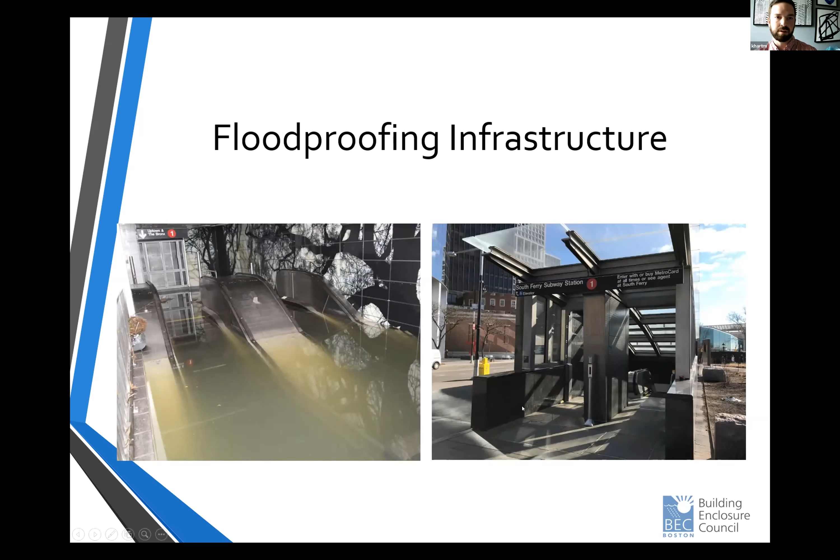Nonetheless, flooded subway, and on the right here we have these walls, and then there's gates. This is an area that would be exposed to floodwaters, rather than what Doug's saying, which came up from another source. At this area, water would be exposed—this would be a flooded area. So we're trying to stop water from even getting down into our subways.

Some infrastructure ideas—a lot of this, when you think of flood walls and deployables, I picture big, massive concrete walls surrounding the city, almost like a dystopian type city, building concrete walls around our nice city where before we could just see the water and the ocean. But it doesn't have to be like that.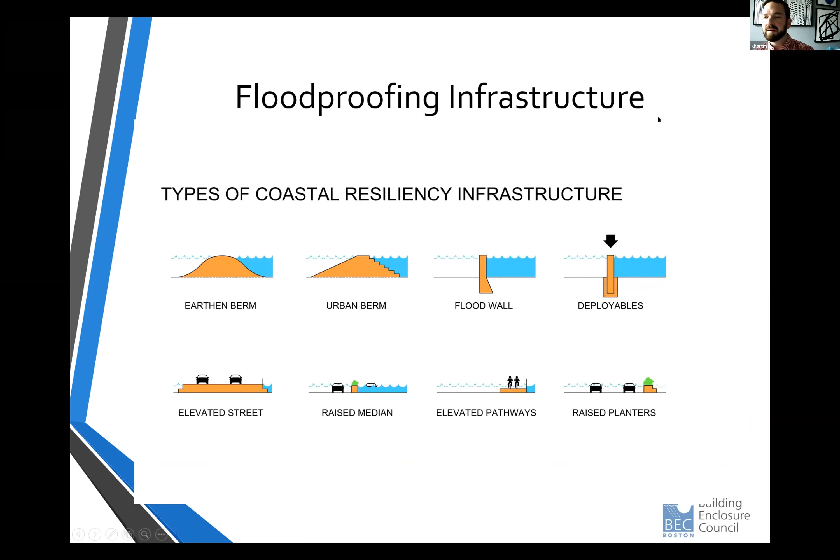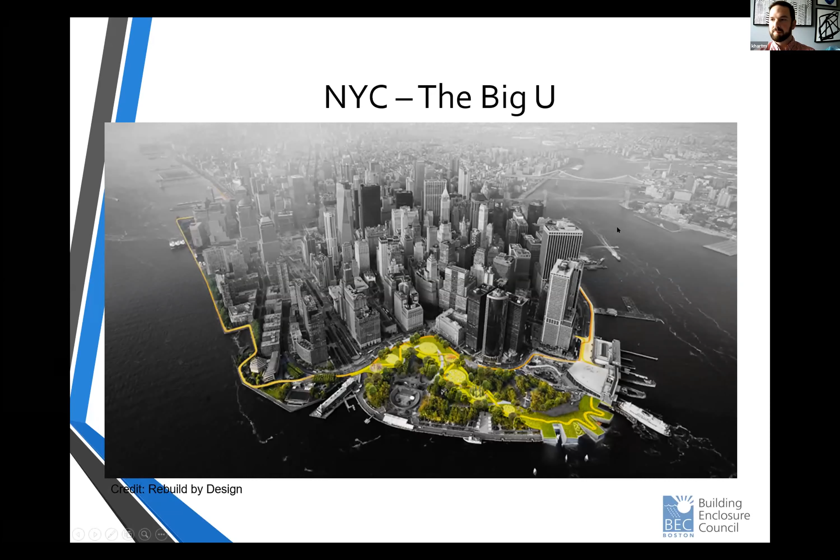This is something being implemented in New York City called the Big U, a big infrastructure project stretching around lower downtown Manhattan, up the East River, up the east side, creating this barrier. Our wet-dry line is no longer necessarily dependent on the buildings—we're stopping floodwaters from even reaching our buildings altogether. This is obviously a big project in its early stages, but something that is proceeding.

The idea here is that we're creating park spaces, community spaces, so that the berms in our landscape and the hills, grassy knolls and whatnot, are at such an elevation that it would stop floodwaters. Our skate parks and whatnot, the ramps are at such an elevation that it would stop floodwaters. So this is largely usable space, but in a flood condition, no one's using them—it's going to help stop the floodwater.

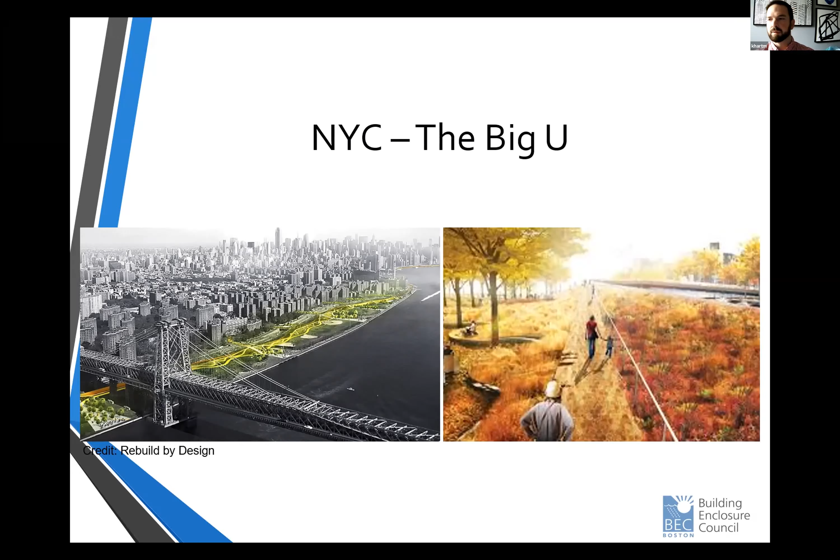This was a long time coming, and there was a lot of controversy with this project. I actually had to Google it before our talk today to make sure it was accurate, and apparently it is delayed, but since the last update they're ahead of schedule. They used it for the first time in October 2020, and it worked—they had a potential flood condition, they put the gates up, and it stopped the water. I encourage you, if you're at all interested, I think it's pretty cool—you should Google it, they have some nice videos of how it works.

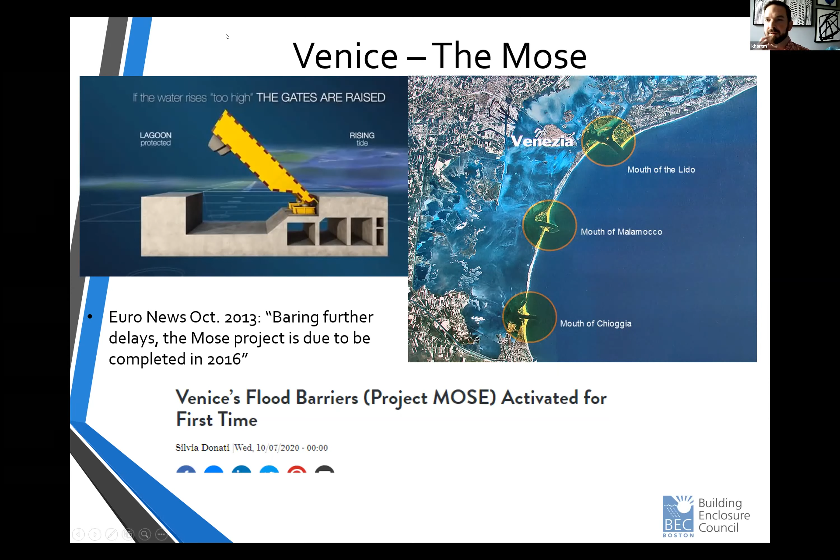Other people are doing this too—it's not just New York, it's not just the U.S. Other people are engineering and using their ingenuity to create creative solutions to real problems. Miami is another good example.

That serves two purposes: one is to stop floodwaters from traveling from one side of the road to the other, because it's strategically above the flood elevation. But two, this helps emergency vehicles—in a flooding or hurricane emergency condition, your police and fire trucks have to get around. So this allows vehicles to still move around the city, and also people to evacuate. Those who are late in the game, or if the storm came quicker than anticipated, these roads should be above the flood, so you're able to still get out of the city if needed.

Miami is also replacing some of their storm drainage. We talked about urban flooding and their sunny day flooding problem—they're trying to upgrade. On top of that, they're filtering and trying to clean the water as best they can before they pump it back out, removing pollutants, and raising the seawalls around the perimeter of the city and the coastal areas.

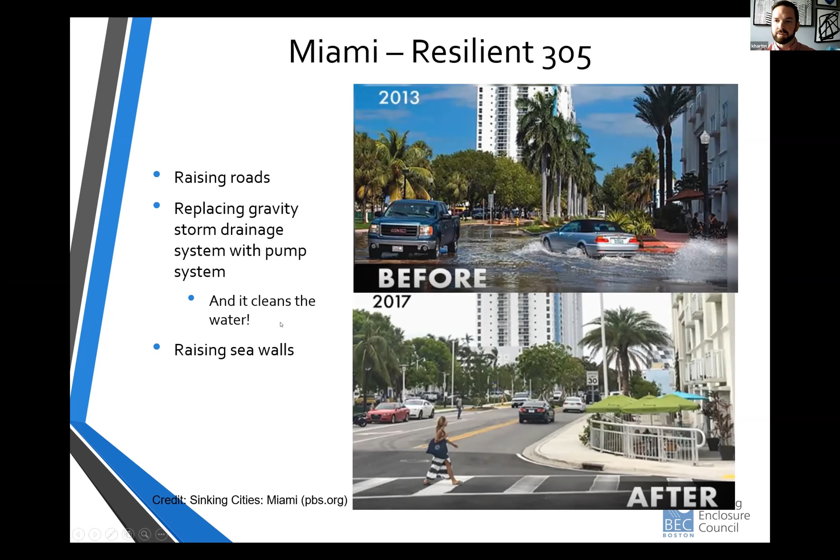So we're trying to control nature in a way it doesn't want to be controlled. I don't have a clear answer, but it's a cautionary tale that it's not good to try to control nature. In my opinion, it's better to set yourself up to react in a resilient way, to use the catchphrase, resisting what nature throws at you.

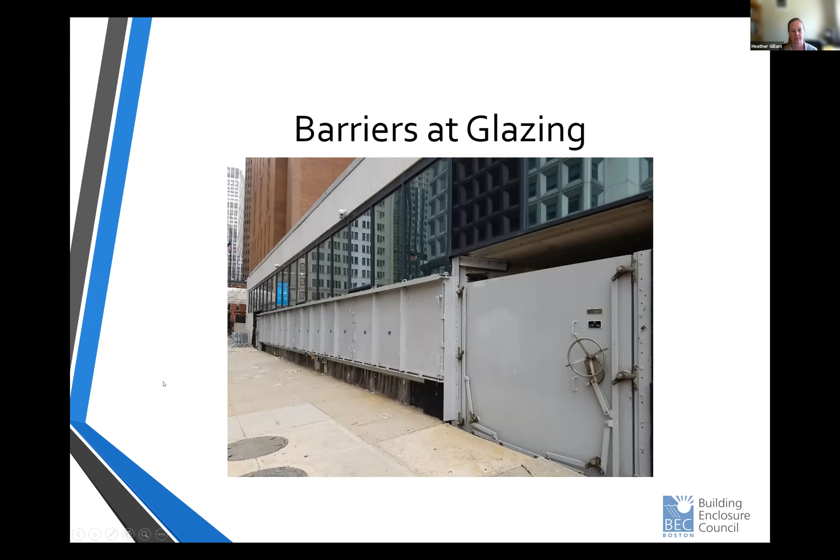I haven't personally seen any of these types of barriers in Boston, but I know we did get a big storm surge a couple years ago, and there were dumpsters floating down in the Seaport district. Over there it's a lot of new buildings, so I think they're building with resiliency in mind, but there's a lot of existing buildings that'll have to consider some of these floodproofing measures in the future.

The building where the BSA is located, right near the Fort Point Channel in Boston, experienced some flooding 8.5 years ago—I guess that was Hurricane Sandy. And they built into the sidewalk footings that deployable gates could be inserted into, with removable bricks marking the locations. That's one place where Boston has moved ahead, and I'm glad you brought that up, Brett—I didn't have a good example for that.

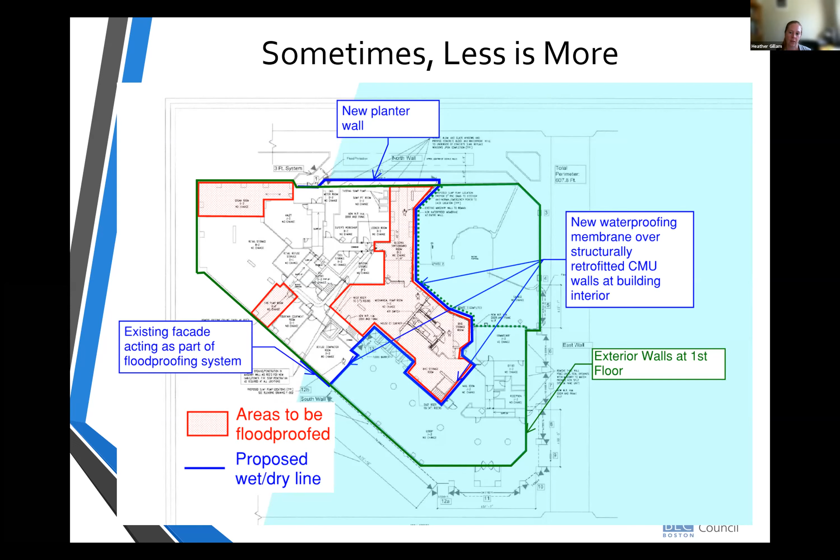Great, thanks Kenrick and Doug. It was a great presentation, lots of information, and I think you did it really well. So thank you. Well, thanks everybody for tuning in.

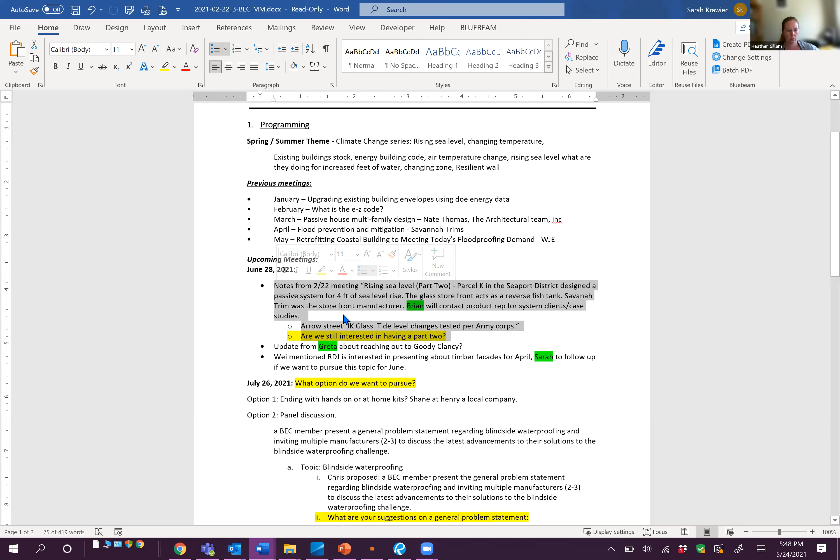Got it, yeah, so we're good with that one. And then I think we were - wasn't a question for me, right? No, it was a follow-up item. Okay, that you had, and I didn't know how it all played out. Okay great. And then kind of looking through...

Sorry Heather, I didn't mean to cut you off. No, I was just going to say that I know we had talked about doing like a 2-part series on this. I was just wondering if there was more interest, and if there are more presenters to continue the discussion on climate change or rising sea level, or if there's anything going on with a seawall or anything in Boston - just seeing what people thought about that.

We've been doing work with FM Global and some of their flood mitigation scope, where the buildings they insure have been requiring upgraded protection, essentially. We did a presentation with them, and I think we had a presentation separately put together for the Northeast region, which has been postponed several times. So there's a lot going on out there. I think New York, like they said, has had a big case that's cost money and people are trying to prevent it. Boston has had some high tides or king tides, but not a lot of damage yet, so it hasn't been as much of a priority.

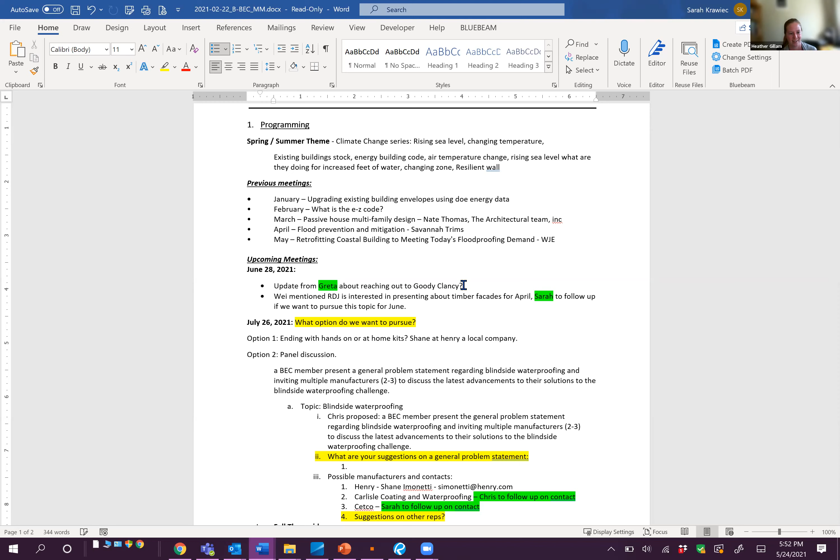And then I know that Wei said he was interested in presenting about timber facades. I know you reached out to him about April, and I don't know if he responded, but maybe we can reach out again and ask for a June presentation if we want that topic, because it's not very relatable to flooding.

Right, and I think it was Rick or someone who pointed out that we recently did a timber presentation. So basically if it was going to be different, with some different information, we were maybe a little more open to it, but otherwise it sounded like it was going to be just a repeat of something we recently did. Yeah, because I think we did one last year.

Okay, so I can reach out to him, or since you already reached out, either one of us can just ask what the specifics were. I'll follow up on that and ask him what the specifics were, and if he's still interested. Then depending on that, we can ask if he's interested for June or not.

I'll see if I can reach out to Julie - hopefully she can put something together for June. So we have a couple of options there. That'd be cool, that'd be good. Does anybody else?

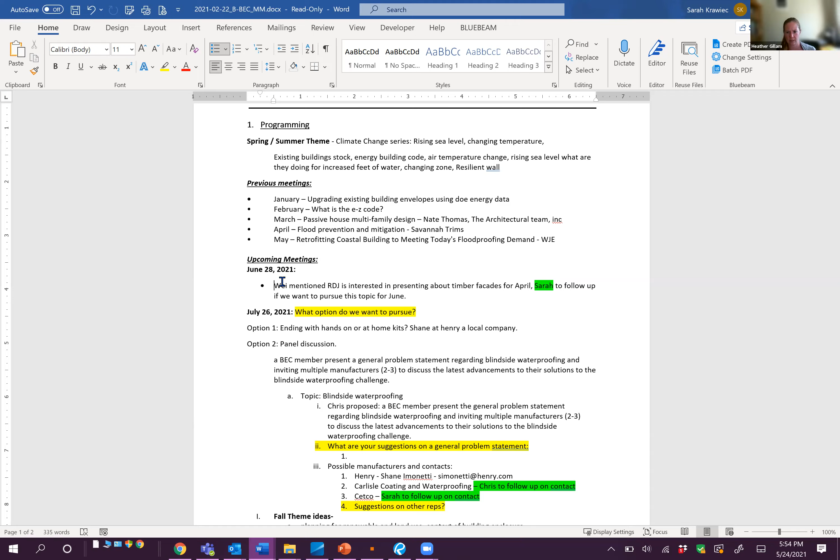I haven't done much research on my end, so I don't know if anyone knows of anything right now, but otherwise maybe search around. Did Shane - I saw the notes there, but it looks like maybe Sarah lost her connection.

Did Shane say that he can do one of those kit things? I don't know, I'll read. It's with Shane, right? Henry, right. Yeah, I can reach out to him.

Have you done any from Shane or Henry? No, the only one I've ever done was through IMI last year. Oh yeah, okay, yeah, that's what we did.

And if we don't find a hands-on one, maybe we... Richard, do you know what we usually do in the summer? I can't remember if we take July off or August off. August, right? We traditionally take August off. Yeah, okay, August, all right.

There's one presentation I'd like you guys to keep your ears peeled for, that I'd love to see - and it may not exist - somebody who's successfully done a commissioning job that involved full commissioning per the ASTM standard. I keep getting requests for proposals for jobs that are LEED. There's two clients who keep asking me.